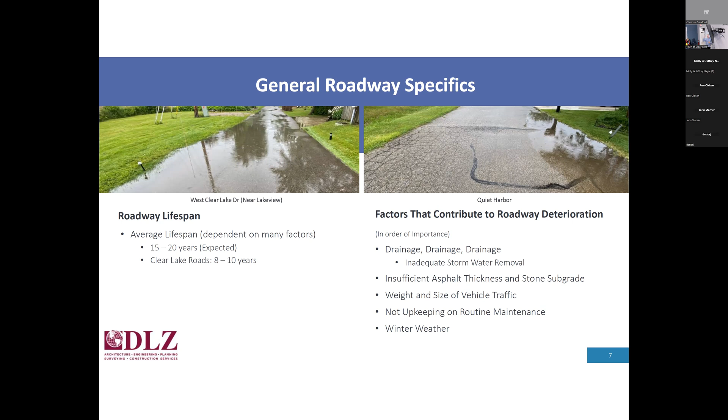And one of the last things, which applies right now, is winter weather. Indiana is very unique in that we get a lot of heavy winter, but also a lot of freeze and thaw happening, so we don't get a strict cold spell. We'll get days that it's frozen, then it gets up into the 40s and thaws out, then gets back down. There's a lot of change that happens to the roadway with the winter we have.

So as I stated before about the PASER rating, this is one of two things we look at to rate these roadways. The PASER rating is what is accepted by INDOT. It was developed out of the University of Wisconsin. It's one of the universal ways to tell the condition of the roadway. It includes a visual inspection of every road by an LTAP certified inspector. We rate them between 1 and 10, 1 being a complete failure, stone and gravel, to 10 being a brand new road. So the basic ranges are: 1 to 4 is a poor road, 5 to 7 is fair, 8 to 10 is considered a good road.

Another tool we have is taking a core sample. A contractor comes out with a drill bit, a hole saw, drills into the pavement and pulls out a sample. INDOT does this for brand new roads to test them. We were able to do this a couple weeks ago, and it provided a little more guidance. Basically it determines the asphalt thickness, the condition of it, the stone used inside of it - different stone has different properties - and also the type and thickness of the subgrade underneath, whether it's stone, sand, or a mix. So those are two of the tools we use to look at and rate the roads.

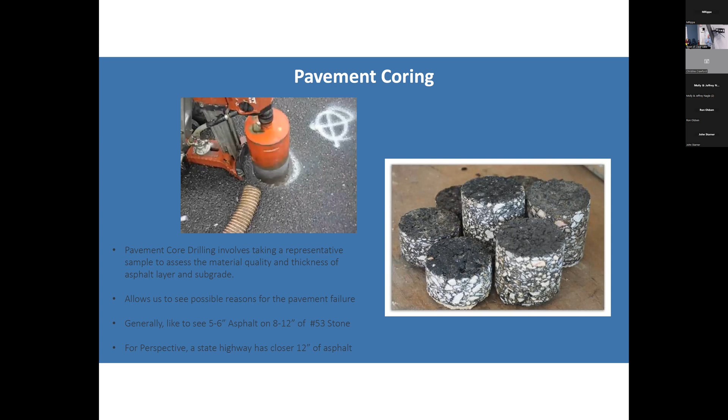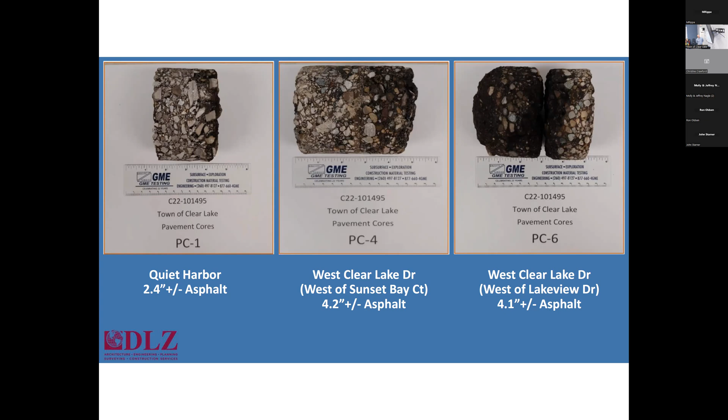Unless they flipped them - except on the sixth, that one didn't look right. Generally they were supposed to keep them the same orientation.

But again, you can see thin asphalt - PC10, there's a lot of small stone in there, not a lot of thicker, bigger stone. And when we build those asphalt layers, we start with bigger stone and then go to smaller stone as we go up higher.

Start with the base that contains bigger stone to give it the stability and structure, and as you go up, there's smaller stone to seal it in and prevent water from getting in the asphalt. So PC10, you can actually see that - it looks like maybe some chip and seal, you see some tar layers in there. Let me go to the next one.

So some of the observed issues, as an example - again this isn't necessarily out here, but this is an example of what would be thin asphalt. You can see the alligator cracking, you can actually see some rutting in it, a lot of different cracking. There's been some pothole patching, so it's been potholing.

On the right here is an example of some sandy subgrade. This was on a proof roll I was on, which takes a loaded dump truck down to test how solid the subgrade is. Again, this wasn't in Clear Lake, but it's an example - that dump truck ended up getting stuck because that sand just sucked in and pushed apart, and the axles just fell in, so they had to get it towed out.

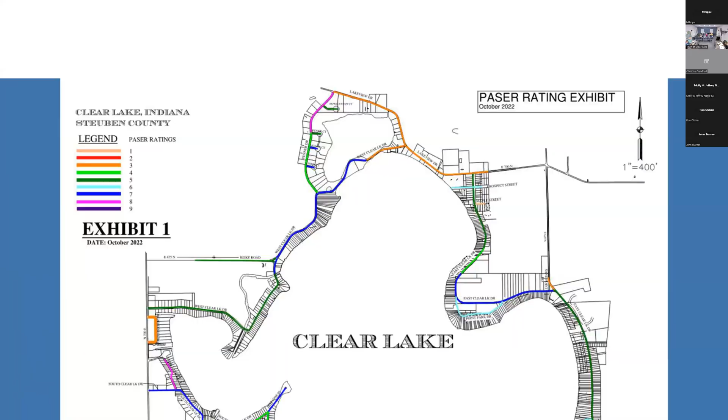Meaning new stone was put in, a thicker asphalt section - 5.5 or 6.5 inches of asphalt was put in. So I'm trying to understand, if it was all redone with new stone and thicker asphalt, that would be more than an 8-year lifespan, is that correct? Yes, that would be considered more of a 15 to 20 year lifespan on that road.

So then my dilemma is why is it only an 8 if that's virtually almost a brand new road? Basically, as I said, 10 is reserved for a brand new road, fully cut through. 9 is reserved for a resurfaced road, and generally within that first year it'll drop 1 PASER rating. Then the next level is 5 to 7. Is that right? Yes. But I think it'll hold at an 8 longer than a 9.

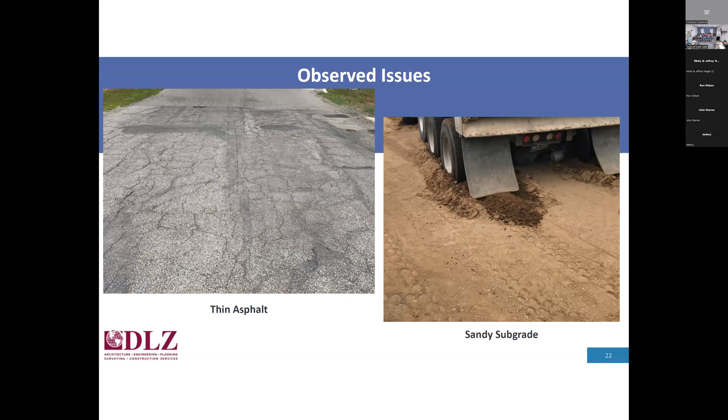All right, now we need to find the slide we stopped at. 25. Yep, right there. All right, so here's the third part of my presentation, looking at those specific roads that were selected and applied for the community crossings matching grant.

Again, when we do these for the application, we don't want to spend a lot of money up front, so we don't go and survey those roads right away. For the application, we do a high level assessment and evaluation of these roads. So these three roads that were picked, we look at them high level, create an exhibit, look at elevations based on GIS, and create a detailed estimate based on that. Again, it's not a final design, but as detailed as we can get conceptually and high level, so that we can apply and get the best grant money possible.

So as we've already discussed, the three roads that were put in the application: Quiet Harbor, West Clear Lake up by the bridge and Lakeview Drive, and then West Clear Lake Drive down there between 700 and Sunset Bay.

So looking at Quiet Harbor, this is the high level conceptual layout that we do to guide the estimate, to come up with the items we put in that detailed estimate and how we want to design that road in the future, or when we get to final design.

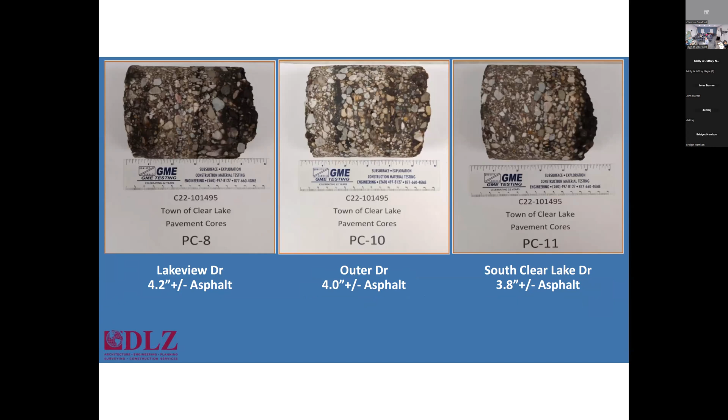Okay, so maybe what we could do—because I want to get to Kay and Evie's questions and keep the meeting moving—Todd and George, could you guys work on that and make sure it's addressed when you come back with the specs, if we get the grant approved? Yes, I can look into that.

Well, that goes to your permitting—DNR and Army Corps—since we've already talked to them. They've all permitted this work that you scoped. Correct, they have already given us permission.

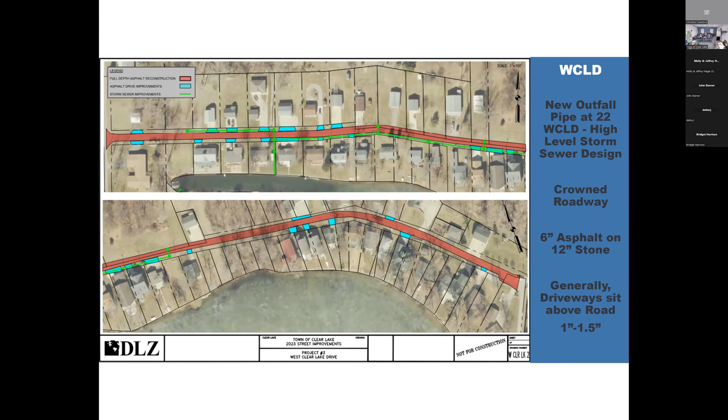Okay, Evie, and then Jim—oh go ahead. I just have one last question. No, it's Evie's. The slide that says Quiet Harbor—I think it was right beside that other one. Yeah, that's one more, there it is, okay.

We can't really touch that as part of this project. But it would be something I'd consider, council-wise, if you need it or not—I can look at it. That's a DNR matter, it doesn't come from the farm, so it would be the homeowners applying to the DNR for that.

And as far as the consideration there, it's really sedimentation from the runoff. Sediments are coming from the fields to the west. We're not going to see sediments of any great amount, I wouldn't think, coming off the road—it's pavement, so it shouldn't. Shouldn't. There was a question—yeah, but no, I get it. I still see it.

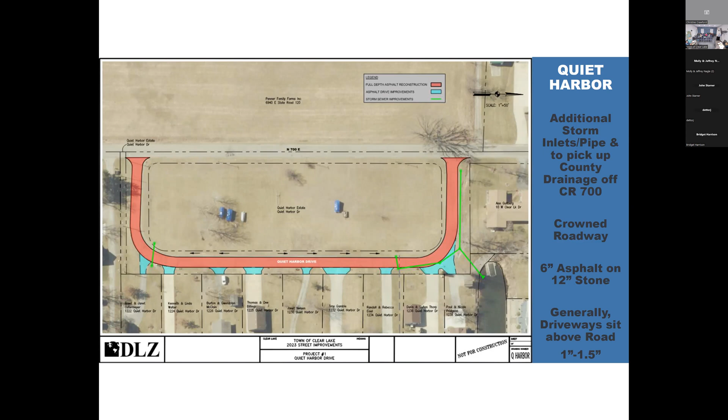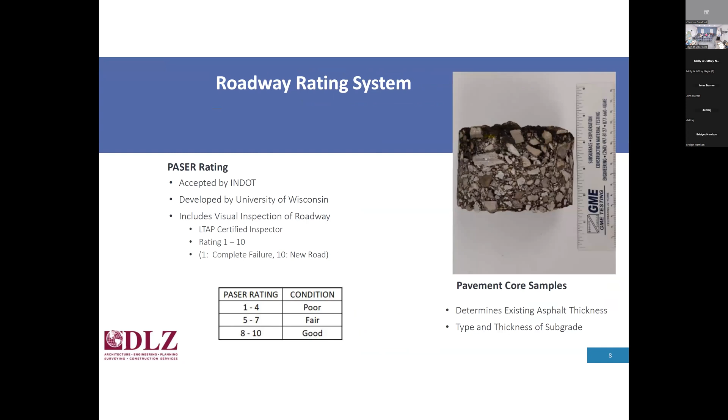No, that's all right. So we have a motion on the table and a second. All in favor of closing public comment, please say aye. Aye. Opposed? None. Public comment closed on this.

I just want to take a moment on behalf of council and say thank you, Todd, and thank you to the residents. I know this has been a very educational hour for most of us. I hope that moving forward, we would have you here earlier in the year instead of in November, and then it might not take three-quarters of our meeting, and I think we'll all learn a lot more, but thank you very much and look forward to continuing.

Thank you, Todd. Yes. Thank you. Appreciate your time. I don't know if you want to stay and answer some other questions when we finish the meeting, or you're free to hit the road and be safe.

Madam President, prior to moving on the agenda, I'd like to make a motion for time's sake. Due to the amount of business we still need to get through, that we postpone item 7C, 7E, 7F, and 8A until the December meeting. I have a motion, do we have a second? George, I'll second. So we have a motion and a second to move the agenda items to December. All in favor, say aye. Aye. Opposed? None. Motion carries.

So we will now move to new business, the sanitation bid, and I believe Dan is starting. I'd like to. Yeah. Good job. Yes, we're at the end, we're doing new business and then reward.

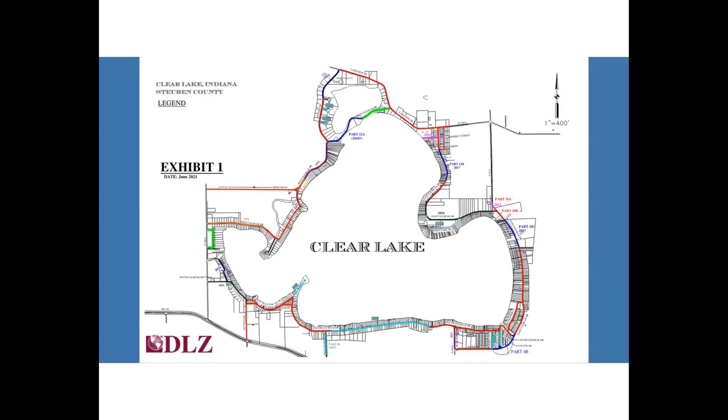I think you've all read the minutes from the October meeting. Yep, the original ones on Friday were actually updated—there were some slight changes for recommendation. I don't need it in there, but I would like it included in this one, for the last meeting.

There was a discussion with Guy when it came to getting estimates or quotes coming in. That wasn't reflected in the meeting minutes, and Guy stated it was truly a problem to get the vendors to even offer a quote or respond to him. That problem began during the pandemic and has continued to the current day.

So we have a suggestion—do we have a motion to approve the minutes with Brent's suggestion? It can just be, my comment can be included in the minutes for this month. I'll make a motion to approve the minutes from last month, as presented.

Wonderful, we have a motion and a second. All those in favor signify by saying aye. Aye. Those opposed, hearing none, motion carries.